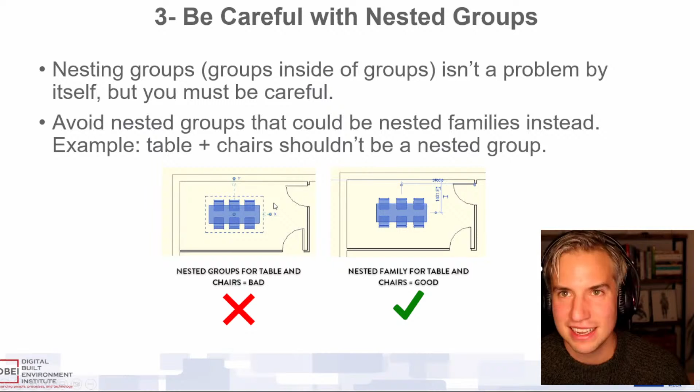So that's bad. What is good? Nested shared families instead. Maybe if we have enough time, we'll see a couple of examples of what I mean by nested shared families. But anyway, especially for furniture like that, it's just going to make your model heavier and cause all sorts of problems.

Let's talk about groupception.

The problem is that you get stuck in permissions. When you start modifying a group and somebody else wants to modify it as well, they ask permission, so you've got to give them permission. So when you start adding multiple groups, and maybe part of a group is part of multiple groups at once, you can cause a lot of problems with permissions.

And when you go deeper than 2 levels, things can get weird. So I'd say, generally speaking, as good practice, don't go more than 2 levels deep. I think 2 levels deep is the maximum I'd recommend. In theory it can be done, but it's pretty hard to manage, in my opinion.

And I would say consider unnesting the groups as the project progresses. So maybe at first, nested groups are okay, but later on, when you're in a more advanced stage, you can get rid of some of these nested groups.

So first, let's bust a myth: mirroring the group will not corrupt the group. It will not necessarily break the group. However, some elements can be reversed.

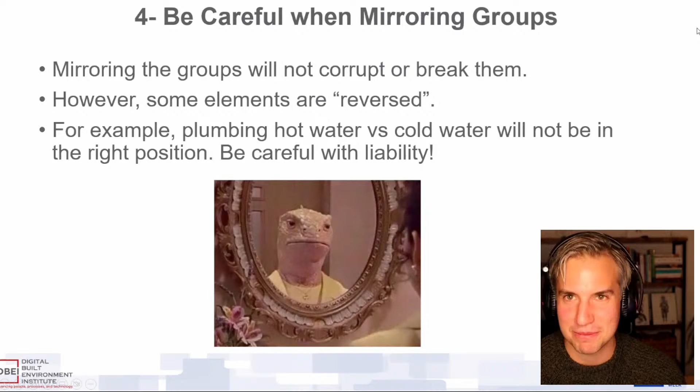So in some cases it might make sense to create a left and right variant. I would probably recommend just trying to mirror the group and see if everything works right.

Ceilings can be problematic as well — I've heard about it. If you have suspended ceilings and lighting families, they can get weird, so verify them if you're using mirrors. I added a link over there, an article by Tim Waldock, aka the Revit Cat, that says a mirror is anti-BIM.

Let me just briefly show it. So this is from our friend in Australia, Tim Waldock: 'Revit mirror command is so not BIM.' It lists all the weird things that happen when you mirror something — first, the element unique ID changes. Yep, Tim talks about lots of weird behavior that happens when you mirror elements.

However, it's funny — when I said that, Tim sent me an email saying, 'I'm not saying never mirror things, I'm just saying be careful with some of the weird things.' Be careful when you do.

Yes, yeah, no, I'll post a link to that. Tim's awesome, and I remember seeing that blog post, I think it was last year, maybe. I don't remember, 2021, yeah. So I'll post a link to that as well.

Tim was actually on the show too. Oh really? I think in like the episode 30s or something, and he came on to talk about NURBS modeling in Revit. It was pretty cool. So cool. I'll put a link to that too. Why not? Okay, so shout out.

But definitely, yeah, that was a great article, a great article to understand how certain elements react to mirroring, not just groups or within groups. It was just general, like when you mirror stuff, this is what happens. So it's a really really good read for sure.

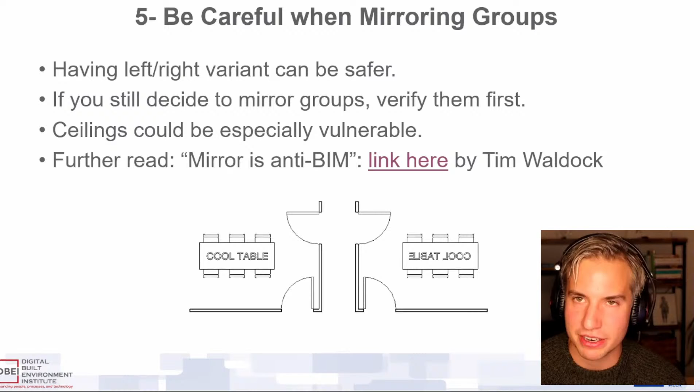Yeah, exactly. And I'll give another example — I have a 3D text and a table family that is embedded on it. If I mirror it, you can see that it gets weird. So again, not saying never mirror, it can be good, especially early on in the project. You want to save time. If you try to mirror and nothing seems to break, it might be okay, and later on you can start to create a left and right variant. So just giving you what you need to consider.

Right, okay, let's talk about fix groups.

Fix groups, as most of you may know, doesn't actually fix the groups. It gives you two options when you get this warning: how do you want to fix the inconsistent groups? The first option is ungroup inconsistent groups, so you lose the group and the elements will never be grouped again - not good. The other is create new group type, basically creating a different group.

I worked on projects back in the day, the first big projects using groups, where people got this warning and weren't very careful, just hit whatever option. 'Who cares, let's hit this button and see what it does.' 'Oh okay, apparently the group has been fixed.' But why hasn't this changed here but not over there? I don't get it. And there's 57 types of unit A all of a sudden - unit A 57, 56, 55. Yeah, I've seen that.

So if you get this warning, never click fix group - this is not a real solution. You've got to click cancel and try to figure out what happens. This is super frequent - if you've ever used groups, I'm sure you got this warning. It's mostly with hosting and hosted elements that you'll get this.

For example, you have a piece of, let's say, a toilet that is hosted on a wall. The toilet is part of the group, but not the wall. So if you copy and paste, the toilet is confused - where's my host? So you'll get this warning.

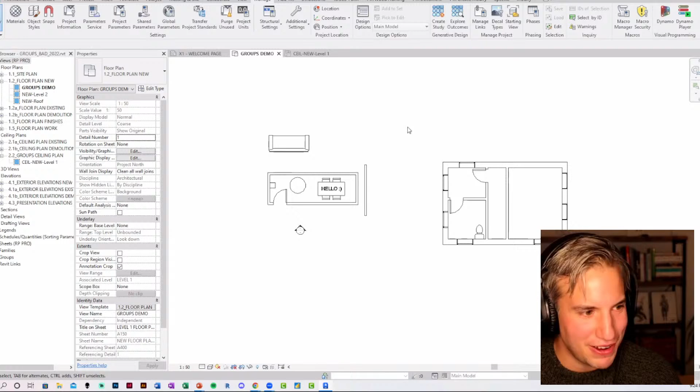Another one, let me bring in Revit. So I have the most boring possible sample file, but sadly my projects were all under NDAs for this one. Simple's better for a live demo because then it won't break as easily. Exactly. So let's create a group with this one.

I'll call it app01 - oh shoot, okay, let's call it apartment B. Let's go into a 3D view. Let's say this is my group, and now let me paste it and change the level to level 2. Right now it is fine.

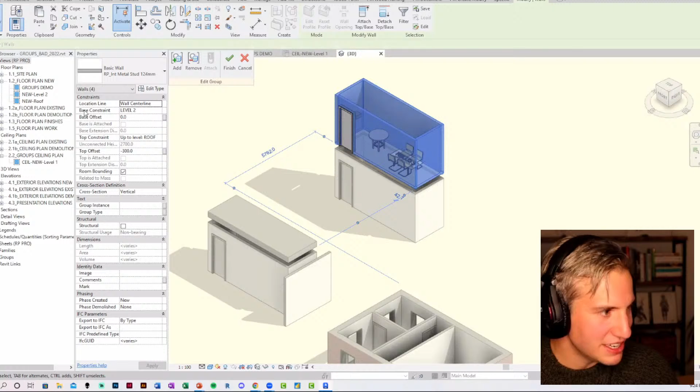Let me show you - okay, so this is good. You can see the base constraints, for example it's level 2, it goes to level roof. Everything seems fine. But if I change the height of the level, let's say that I push level 2 like this...

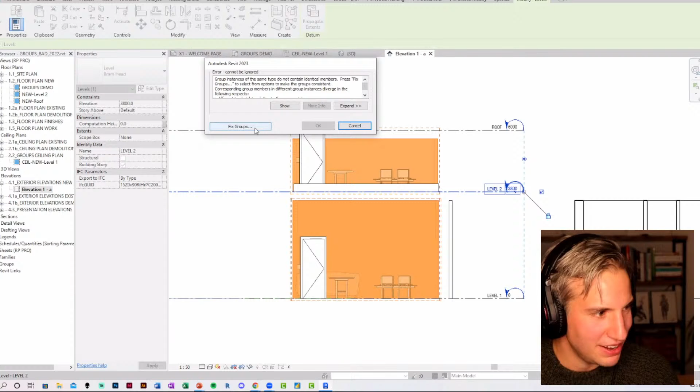...the group gets confused. I don't know what to do, like the constraints are weird. Yeah, you get this warning, blah blah blah. And if you don't pay attention, you hit fix groups, you get the two options. Click one of the two and you break the groups and cause irreversible damage to your model.

So don't do it, don't do it - or click cancel and fix it, that's it. Yeah, and you won't get it again, right? Exactly, yeah, that's awesome.

Don't lock and constrain the group to an outside element. Let's say you have a group and you constrain a piece of furniture to a window that's outside of it and lock the constraint. If you move the window, if you move the group, Revit will get confused. You might get a warning - maybe not the fix group one, but anyway, just not a good idea to do something like that.

When we're talking about layouts for apartments, don't include exterior walls, corridors, and party walls. So, let's say that we do a quick modeling.

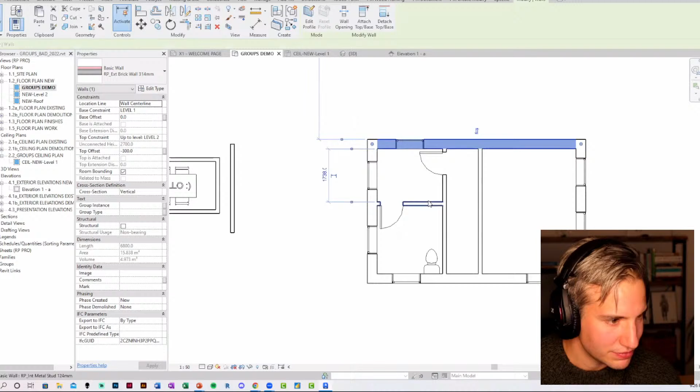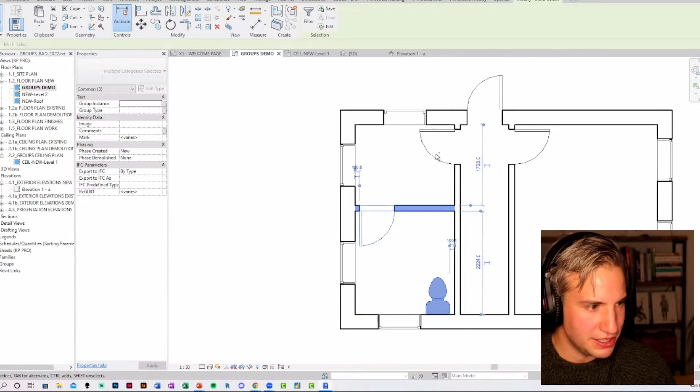Okay, let's say this is my apartment, right? This is the corridor, and let's say there's another apartment out there. This is the entrance - so this is apartment A, this is apartment B. What I would include in the group - I would not include any of the exterior elements, and I would include this, this, and this, and I wouldn't include the entrance door either because it's hosted in the corridor wall. So that's the only thing I would include inside the group.

Of course it's a fake apartment, you would usually get more, but I don't include the corridor wall because the corridor might touch multiple different units. Exterior - I never mix exterior and interior in the same group. It will just cause all sorts of problems.

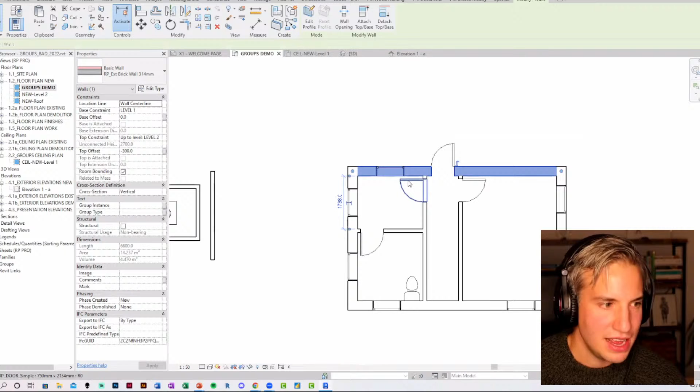And party wall - let's say you have a wall separating different units. How do you decide which group it's going to be in? Better to leave it out of the group. And would you not bring in the door either? That's attached - anything hosted to the party wall you'd probably try to keep out of it as well. Yeah exactly, like if you include an element, you need to include the host as well, which means the main doors on the corridor wall need to be on their own, not part of the group.

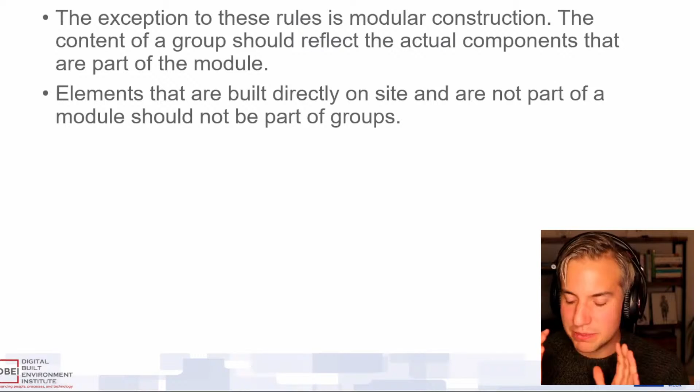I mentioned that the exception to this rule is modular construction. I've been working in modular, and the party wall, for example, is a doubled wall for each module. In this case, it makes sense to include everything that would be in the module itself. But if you're doing traditional construction, it's better to think in terms of interior versus exterior, and even interior, remove party wall, corridor wall, and so on. That makes sense, because you could have a modular unit that has exterior and the party wall, or at least all four walls, depending on what those walls are. Even in modular construction, part of the exterior wall is there, I just separate the siding, so the brick or whatever they're going to put on the module is done separately. So there are two exterior walls in this case.

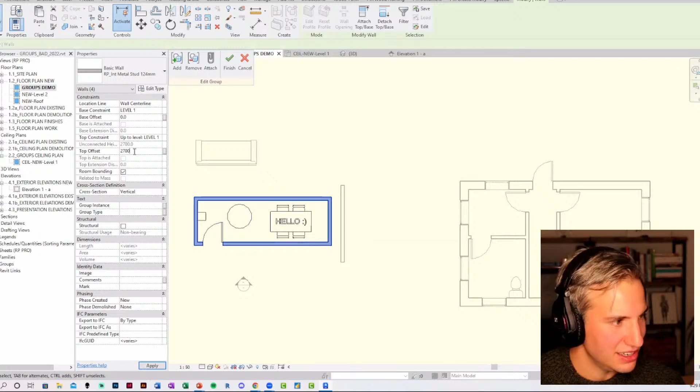Earlier on, I've shown what happens when you put constraints, and if you have different heights of the levels, you will get the fix group warnings. So what I recommend is to put unconnected, or you can just put the same level. So where do I have a group? Okay, let's say this is this group, and all the walls right now have to go up to level 2. So you could put unconnected and just put this offset value. Someone emailed me saying that instead of unconnected, I should just use level 1 and put the top offset, which in theory is the same thing, but I can see, depending on the wall makeup, there are some different reactions.

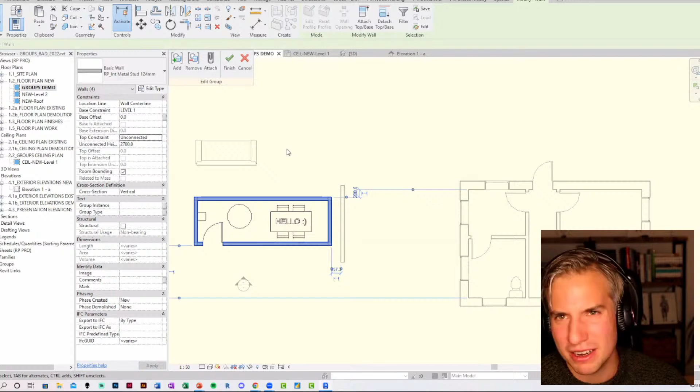I think there was some sort of bug that happens if you use unconnected. I'm not so sure about it, but that's what the person told me. It should have been investigated, but anyway, unconnected worked fine for me. I didn't have any issues, but I would have to look back. But yeah, use unconnected - you will avoid warnings if you use the groups on multiple levels and you have levels of different height.

Somebody in the chat has a question I think is pretty good for the example you were just showing, which is: would you include ceilings within those apartment groups if there were ceilings in there?

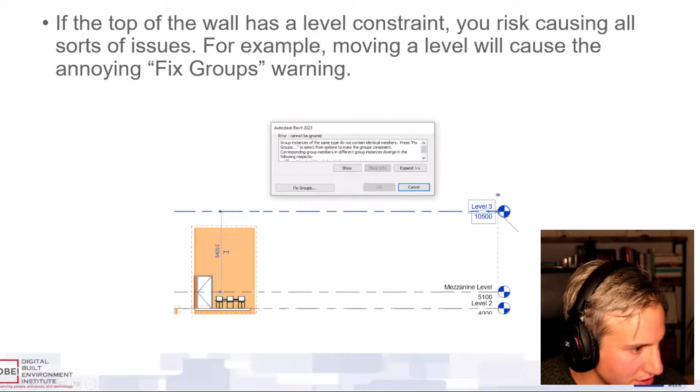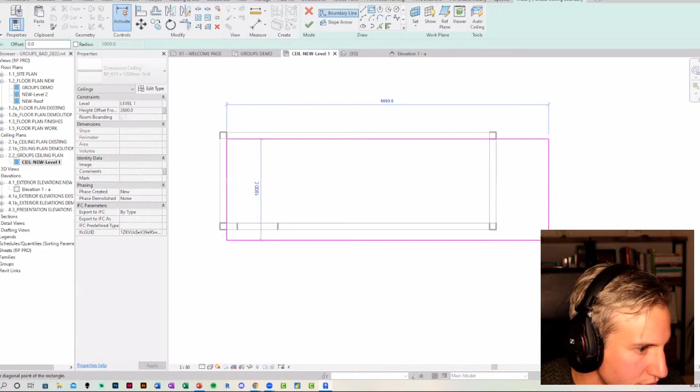Yeah, I would include the ceilings. I can show you where - do I have it? Maybe later, but anyway, I can talk about it right now. Do I have a ceiling plan in there? Let's say it's here. Okay, if I add a ceiling - okay, this is my ceiling. Make sure it is set to level 1 with enough offset from level 1 as well, and don't use level 2 and set a negative value, for example.

If you do that, it will get confused when using multiple heights. Makes sense. So yeah, but I would include the ceiling.

I don't know if the question is referring to some of the bugs that ceilings can have with mirroring and odd behavior. Maybe it wasn't that specific, but he said, would you just include them as part of the apartment groups or in their own groups, based on levels? I'm not really sure, but I think what you're saying there is keeping them as part of the group, but making sure that they're hosted to the same level as the group, same idea with the walls.

Maybe what he's referring to is that a lot of times, especially in residential, you might have a level for underside of structure or something, and then tops - depending on, especially in wood construction, a lot of times it's nice to have that bottom of joist or whatever, and so maybe that's what he's talking about. But as long as you have it hosted off the same level as the group, then you're safer, because if you host it off a secondary level, then you're not gonna do good, like you showed.

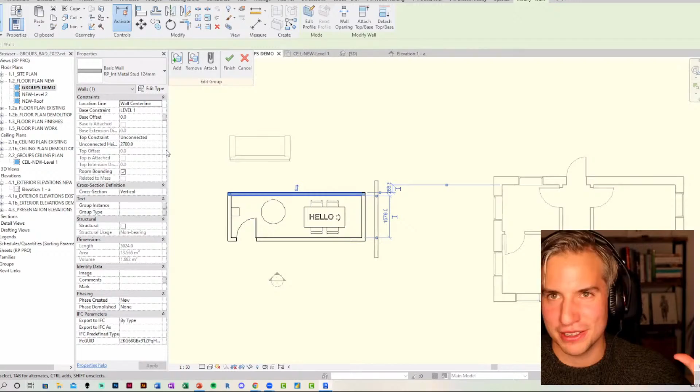Generally speaking, everything is hosted on one level. I've shown the constraints, the bottom and top constraint, everything is level 1, and make sure that all the elements are also all on the same level. I don't want to see any element on the group referring to anything other than level 1 or unconnected. Good point, so you will avoid lots of issues - lots of fix group things are just constraints that have gone bad. Fair enough.

Okay, I lost my page. Where am I?

He was referring to the ceilings within the groups, but if the level heights have to change, then remove the ceilings from the group. Then it's a different group anyways, right? If you have one group that has an 8 foot ceiling, another group that has a 9 foot ceiling, I'd argue that's a different group type. I mean, probably, unless...

There's like different heights on the same apartment, maybe, but those are all offsets from level one, right? So those would be consistent as far as the group. But if you went to another apartment type, let's say there's apartment type A, and the other one has A but it's 10 foot ceilings instead of 9, I'd argue that's a different type.

In this case, if you have really different ceilings, is there a case that maybe ceiling can be included? Maybe. Fair enough. All right, so we talked about that.

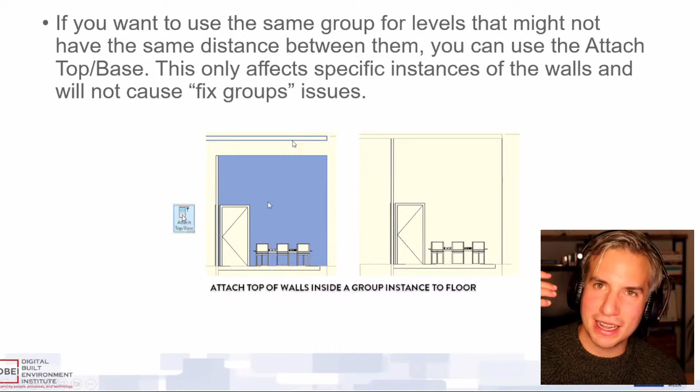Okay, so if you don't use a constraint to the walls, you do make sure that they go all the way to the slabs. So there's the only possible workaround for this. Let's go back to the 3D view and use this one, and I copy it again.

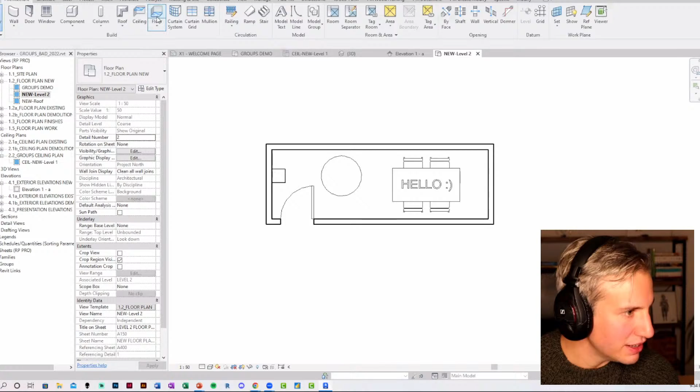Just having a look at something. Okay, now they're unconnected, which is good. Let me create - do I have a slab on this one? Not really, right? Okay, so I'll go to level 2 and just quickly create some sort of floor, and going back to the 3D view.

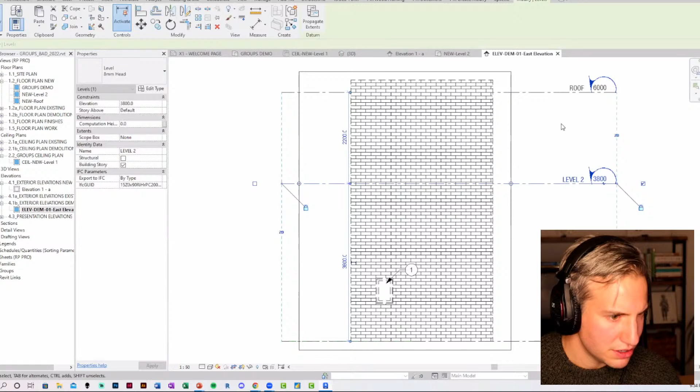Okay, let's just pull the height a little bit, and go back there. Okay, I don't need this. So the problem with this is if you have different level heights, how do you ensure that the wall will go all the way to the slab? So there's one thing you can do, one behavior that is specific to a group instance and will not affect the other groups, and it is to attach the top and the base.

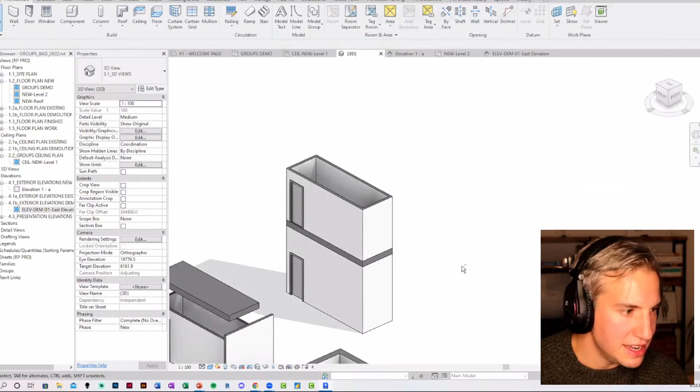So you can use this tool and attach like this, and you can see when it will be done. So you can see that this only affects this instance of the group. So we have the same groups, but this one we've attached it, but it doesn't affect this other one.

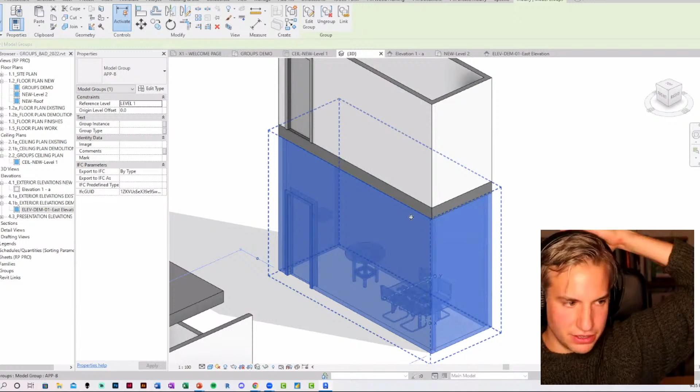So I know the attach top of wall can be a controversial tool. Not everybody loves this - it creates constraint. But in case you have different level heights and it bothers you that the walls aren't going all the way to the slab, it is the workaround.

Is that changing if you edit that group and select the wall you just attached - is that changing the data for the height? No, it's still saying 2700, right? Because that's the profile of the wall. Got it. Exactly. It's like if you did a profile edit.

And that's the only issue when it comes to the attach wall tool. In my opinion, as a downstream user of BIM these days, that can be an issue because what's reported as the wall height versus what the wall height actually is can be an issue. But that's a good question.

Let's have a look at the area. This one is 16, and this - it might give you the same areas or separate areas. No, it seems to compute the area difference, which is good.

But the unconnected height is not good. So that's again giving the geometrical information for the area, but having worked with estimators, sometimes they don't like looking at the area of the wall because they like to take just the length times the height and ignore the openings for the way they do the take-off. And so when you do that, that's when you start realizing the height of the wall isn't always the height.

And there's different ways too - even if you didn't do attach, if you did edit the profile and just pulled it or modified the profile, it doesn't change that height either. I've just noticed that. I don't think that's maybe the only reason why people don't like attach, but it's one of the things that has affected me for sure. Maybe in this case, if quantities and the unconnected height is an important value, if you really have different heights, maybe a different group can be used in this case.

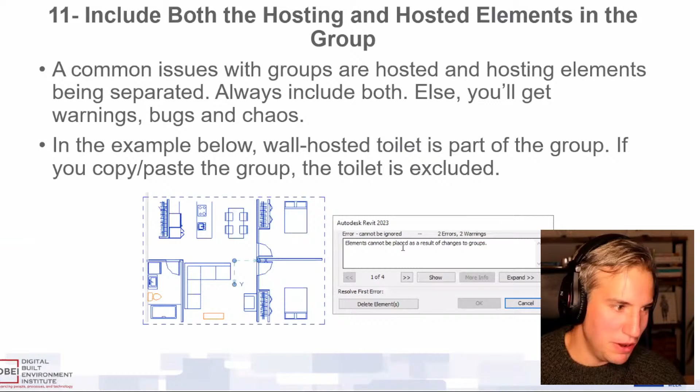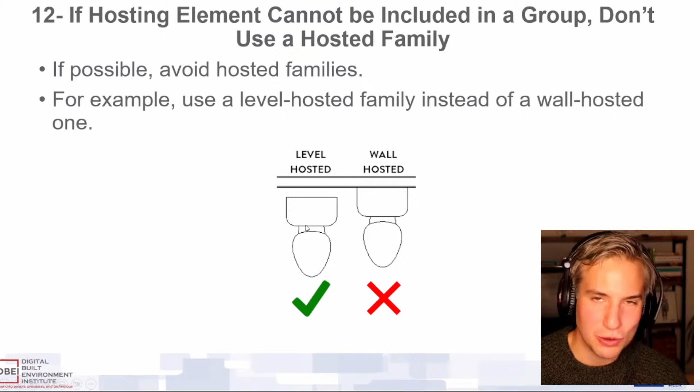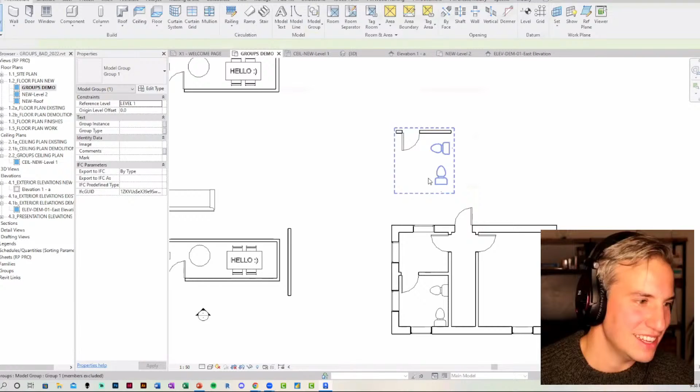Another problem with groups is that it's better to have elements that are level hosted and not wall hosted or hosted in other elements. Let's see what we have here, this toilet - okay, this one is wall hosted. Let's say this is my apartment, I place it there and add it to my group, then try to copy and paste. It gets confused because it doesn't find the host wall. You can see what happens: I only have a wall and a door now because the two toilets are excluded from the group. I can try to restore all the excluded elements, but it doesn't really work. So in this case, use level hosted families instead of wall hosted.

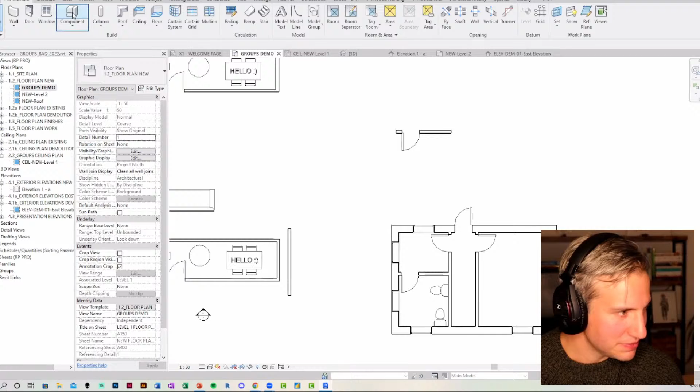So I generally prefer level hosted families when creating groups for multifamily housing. I avoid all sorts of weird issues like that - that would be my advice. As I mentioned earlier with the ceiling, the same thing: always use the level, the base level, and don't use a negative offset from the level that is above it.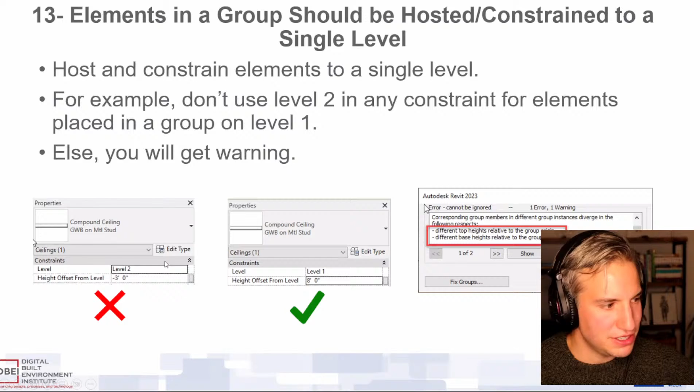Now let's talk about face-based families. I know you talked about this with Aaron on the last show. Face-based families, pretty controversial topic as well - they're weird with groups, I would say so weird with groups. I can't even tell you the amount of weird crap I've seen with face-based families and groups. Really weird behavior, and at first it might seem okay, and at some point you're like, what is going on there? Just weird heights, offsets, fix groups.

You can see an example here. If I have a face-based family and I give an offset to the group, the face base doesn't move. And this is for vertical - if you place a face base on a vertical plane, you will get this weird behavior. If you place it on a horizontal plane, usually it seems to be okay. But why would you place a face base on a horizontal plane? Good question. But with the tests I made, it doesn't seem to cause issues.

I guess the horizontal could be with ceilings - a lot of face-based families for ceilings, and that's true. Even that can cause some wonky stuff to happen. So maybe in this case, just avoid them as much as you can in groups to avoid problems. Agreed. The same for work plane based families as well.

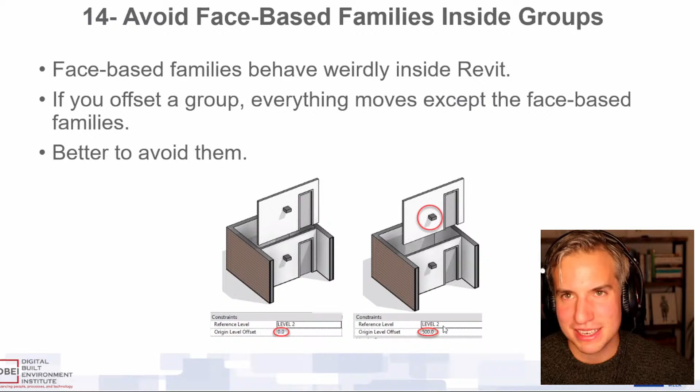They're pretty similar to face based and seem to have the same kind of issues. For those not familiar, for any Revit family you have a checkbox that says work plane based, and it causes the family to become very similar to a face based family. So I would avoid that as well, and even wall hosted. Generally speaking, just standard non-hosted families work the best for that. Definitely.

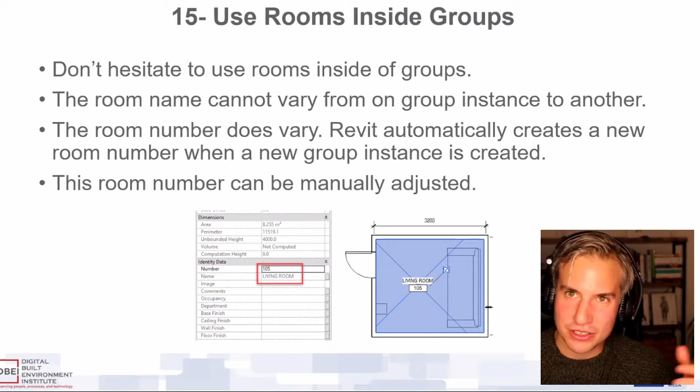Use rooms inside groups - I would say rooms work pretty good in groups, generally speaking. What happens when you place a room is that the room number can be changed, but the room name cannot be changed. So you will have to keep the same name everywhere. If that's a problem for you, well, just don't put the rooms in the groups. But you can change the number, and it's automatically adjusted to the next one if you copy and paste the group.

I can see the time fly, so we'll surely be getting into some Dynamo stuff, but let's finish some of these tips. All elements inside a group are in the same workset. If you're using worksets, don't even think about trying to add elements on multiple worksets - it's not good.

Even if that wasn't the case, elements inside groups are assigned to the group's workset. Each group has a specific workset, and when you change it, all elements inside are assigned to that workset. In theory this shouldn't be an issue, because the workset of the elements is acquired from the group, but it's something important to be mindful of.

If you're using worksets in a way where you place elements in different worksets, although I generally recommend using worksets simply, keep in mind you will lose that, because the group has a single workset for all elements inside it. Generally speaking, all group instances, if you copy and paste a group, make sure it's on the same workset, else it could get weird.

And phase setting as well - the group itself doesn't have phase created and phase demolished. You cannot phase a group by itself, but each element inside the group does have that parameter, and the phasing can vary from one group instance to another. So you could add the exact same apartment, and one is created in phase existing while the other is created in phase new.

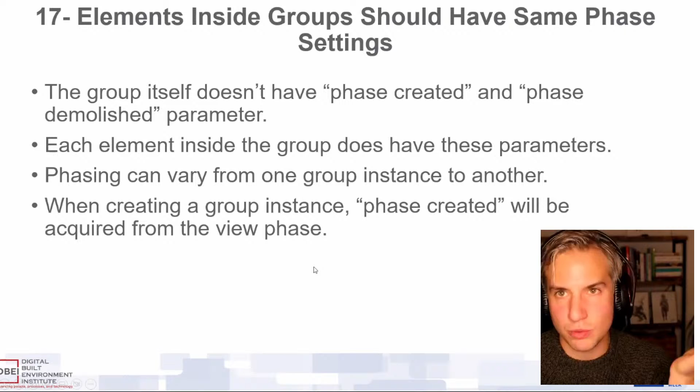But when you paste a group instance, it will acquire the current view phase, like any new element. Maybe I can try that a little bit, so you can see here.

So I'm taking this one and let's paste it into the existing floor plan, pasting it over here. You can see I have a phase filter that makes it gray. And if I go back to this one, it's over here - you can see it's gray.

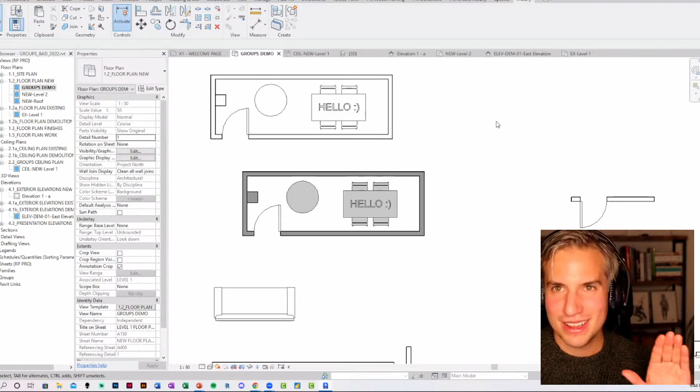Why? Again, no phase settings for the group itself. If I enter the group and click on this wall, it says phase created existing. And this one, if I edit the group, phase created new - which means that it's the same group, you click it, apartment B, for both of them, but the elements inside can have different phases.

And it can get even weirder, each element could have a different phase. So this specific wall is new. I don't remember if it holds... that was an issue, and that's a great point. Hopefully everyone follows that - the elements inside the group have their own phases, and they're going to have phase created just like you would with any element. Whatever you paste or create the element in, it's going to have that phase.

But I don't remember - does it hold phase demolished as the previous phase or the current phase, or does it not even hold demolished when you paste it? I don't remember. You have to test that - it won't hold it if you copy paste, I don't know, let's see. I'm curious, okay, let's try it.

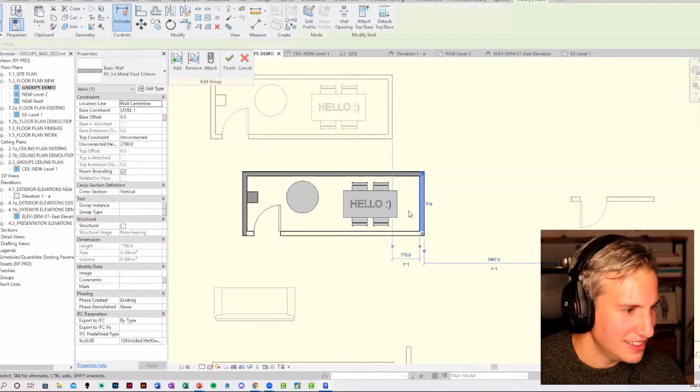Sometimes with those elements it might actually - like when you bind links and stuff, it tries to map that demo correctly, but I don't know if it will. Well, I've just switched this wall over there to demolished, and we'll see what happens.

It doesn't affect this other wall instance. But let's say that I take this group and paste it into the floor plan view, pasting over here on top of another one. It seems that copy and pasting doesn't affect the other wall, of course.

It resets the demolish - it just ignores the phase and resets it. And that's good to know, right? Because you could be sitting there thinking this is great, I could show the same demo in every single room and in the same phase, but I guess it doesn't work that way.

So personally, I like simple, which means I'll tell users to try to put everything new inside the group - if you're doing demolition or existing, don't put it in the group, it could confuse people. And I wouldn't mix different phasing. I'd try to make it simple, one group per phase, or something users can easily understand, and not try to do some fancy multiple-phase setup on the same group. It seems confusing. Of course there are exceptions depending on everyone's workflow, but that would be my advice.

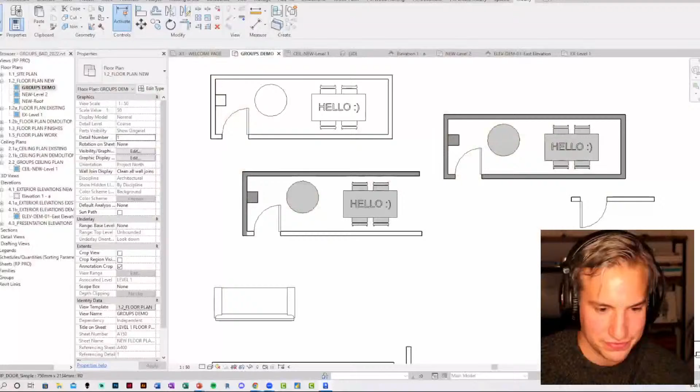Okay, so that's for phasing, I've just shown that. Don't make groups too large. Remember that only a single user can modify a group, else you will get the permission hell, as I call it. The more elements your group includes, the more complicated it is to collaborate. Avoid permission hell. For example, creating a group for an entire apartment floor, that's something I saw on the tower - one group for the entire, like, 4 apartments. I think that's too much. Keep it more simple.

Let's talk about something really interesting, an argument I actually saw against groups over links when it comes to modular construction. Groups are porous. What does that mean? It means they will try to join to the element next to them, which is probably okay in regular construction. But as I mentioned, I'm doing modular construction, and I don't really like these joints at all because it's a totally separate element that is going to be constructed separately. So let's go over there.

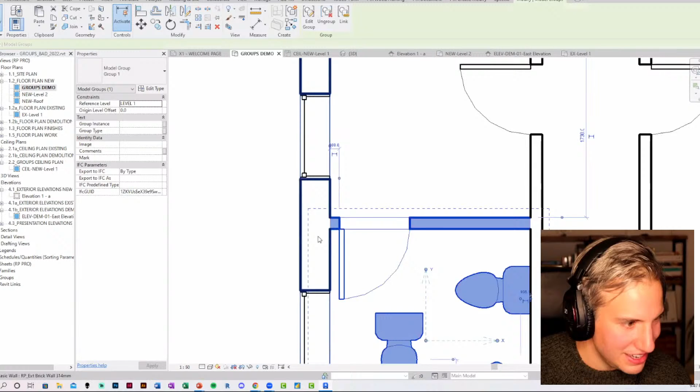Okay, you can see right here, let's say that I create a new wall and I paste this group over there. Whatever, and if I move it there, you can see that it joins. That's what it means by porosity - it just absorbs everything. It interacts with your environment around it.

So there are solutions to it. You could decide to dissolve the join and move it like this, and now you've fixed the issue. But if you're doing modular, it's something you have to think about for every single wall. I've done it on a modular job, and it was every single wall - I had to make sure that I wouldn't see this line because it didn't make sense.

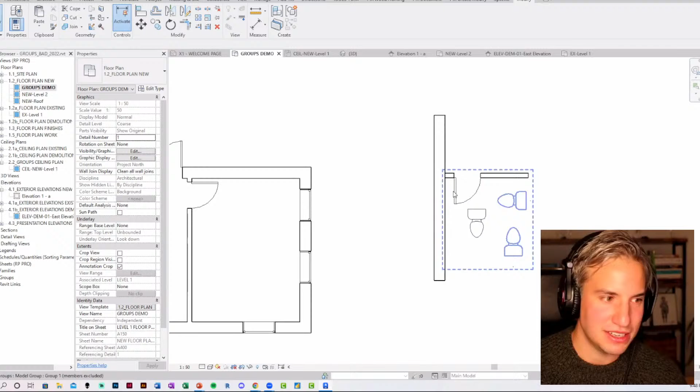Alright, okay, I think we went through the whole thing. And another one I would add - don't use groups if there's a single instance of the group. I don't know why, sometimes I enter a project and think, why is this a group? I select all instances in the project and there's a single one. Like, why is this a group? I don't understand.

Something else - groups can be cool early on in the project to copy and paste similar things, but then you can ungroup. If you want to quickly recreate a layout, you can create temporary groups. They're good for that as well.

Definitely, something Chris mentioned, who had the question about the ceilings, is echoing what you were saying about worksets or working - you can only have one person working in the group at the same time, and so having ceilings separate is helpful if you've got someone working on RCPs and someone working on the floor plan. That's a valid point. Yeah, makes sense.

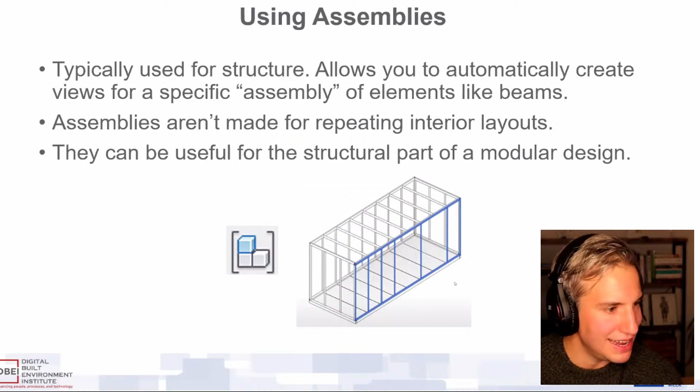So this one was about groups versus assemblies versus nested families versus links. Generally speaking, I won't go too deep into that - assemblies are more for structure, generally speaking, and nested families are pretty cool. I mention it because I see a lot, when working with people, that a lot of people are using groups when they should be using nested families. I'm guessing most people are probably a little bit familiar with the idea of nesting families.

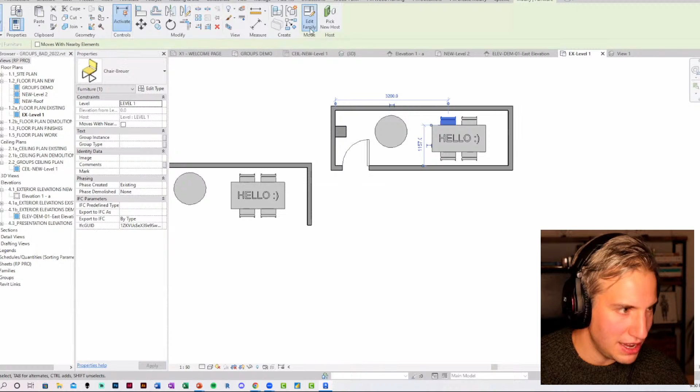But I have a good example here. Let's say that I ungroup this one - to me, this is not great. If I want to use this table and chair multiple times, it might be a good idea to create a nested shared family. Let's say I have this table, and let me go back here, and I want to add a chair inside of it as well. So when I have the shared family, I just make sure the shared box is checked, and I load this into the table family.

Sean Page just said familyception. Yeah, nice - groupception and familyception.

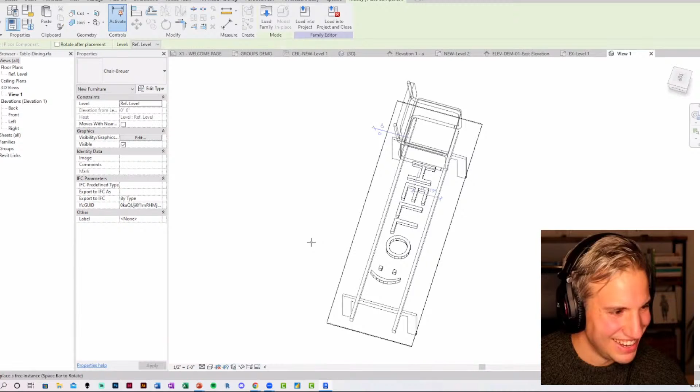Of course I could be much more precise and use reference planes. But what's cool about shared families is you can use visibility parameters as well, and you can add a family type parameter where you could swap chairs if you have a couple of them loaded in the same family. For now, let's load this back into the project.

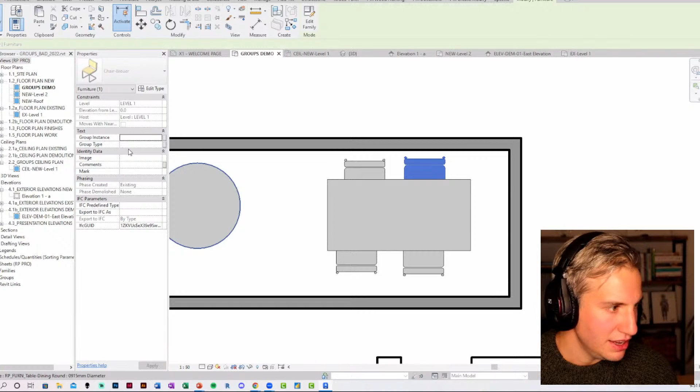And now, of course, I will have too many chairs, so let's delete these. But this is shared families. And what's nice about shared families is you can tab select the individual part of the family. So I can tab select this chair, and it can have a unique mark.

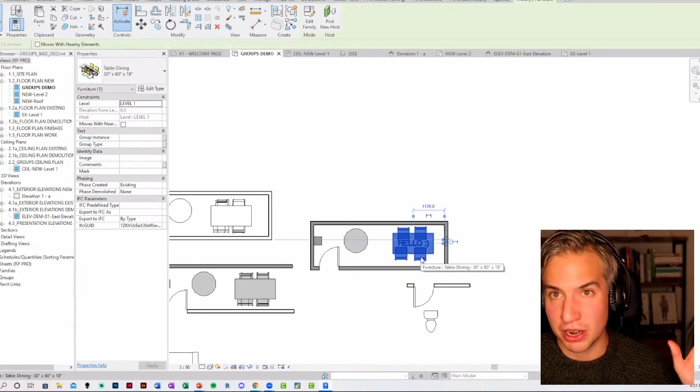So it's really kind of a separate family, but that is part of it. I'm sure most people might be familiar with this, but I mention it because too often I see groups when this should be a shared nested family. For performance, this is much better, nested shared family, much faster models, right? Especially if you have lots of occurrences, because groups can be a bit slow if there's too many of them, especially multiple nested groups. As I mentioned, groupception, like familyception is better than groupception.

Okay, shared. I did put a reference from Belinda Carr that really compares model groups to nested families, and she gives an example of an operating room where, let's say there's 200 operating rooms in a project, and it's always the same layout. A shared family is good for that. But shared families have a limitation, it's only loadable families, so you cannot include walls, you cannot include floors, you cannot include ceilings. But other than that, they're pretty cool.

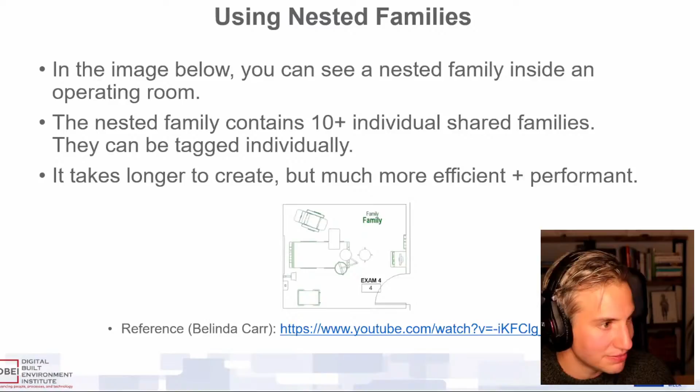I really like nested shared families here. And they're schedulable as well, so like the chair I had, it can be scheduled individually, separately from the table. And you can tag them as well, tag the individual elements, not just the whole family. And if you're doing groups anyways, none of those elements should be wall hosted, even for that operating room, so it shouldn't matter.

Okay, so the limitation with nested families is they don't include system families, so groups are still helpful for that. But you could have a group with multiple nested families. Something I saw is for bathroom layouts as well, like the handicapped bar and all the soap dispensers and so on, which is such a bore to model. You could have a shared family that includes all of this stuff, and you place it into your apartment, and then that is part of the group as well.

Okay, links, as I mentioned, you talked about that with Aaron. I won't go too deep into it, but you can read the handout. I did put a few of the pros and cons.

Mostly, well, it's just annoying to work with. It depends how many models you have, but I was working on this modular project where there was like 50 models, one for each department. It was not very fun to work on each of these. Editing can be a pain too, and I could tell you, inheriting projects like that when you didn't set them up is always fun, figuring out type A, type B, and all the links. I've been there.

And with links, there are no instance parameters for the elements, we're going to talk about this as well. And reloading the content, if you change the wall types and families, you have to use some sort of Dynamo script to push all the content around. So not that fun, and to tag and dimension can be problematic.

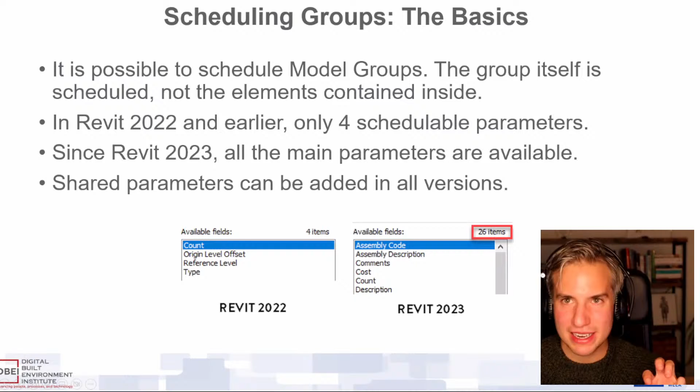So scheduling groups, if I try to schedule the groups, well, you can see that in Revit 2023 there are a few more things you can schedule, but still you cannot really schedule the elements inside of the groups, it's just the group itself. So what are you going to say about the group, not that much, right? You can know how many units you have, but that's probably already covered by the rooms. So this is an example of a schedule that you can make with groups, not a lot of information. I have 4 apartment B on level 1.

Okay, but if you want to know everything that is included inside of a group, for example, I have the whole process to automate with Dynamo. I don't think I'm going to recreate the whole script, but the first thing I would do, and it is pretty crucial, when you create new parameters, I usually create two: one called group type and group instance, and assign this parameter to all the categories that could be included inside the group, so walls, ceilings, plumbing fixtures, furniture, and so on. Got it, so you're just making an instance and type parameter, and then you're adding that to groups.

So you have somewhere to type in beyond just the group type. The elements within the groups have the ability to assign a parameter to themselves. Super important, make sure to check this box: values can vary by group instance, which means that on different groups there can be a different value for the same element. If you check the other box, the parameter will be grayed out, meaning you have to enter the group to modify it.

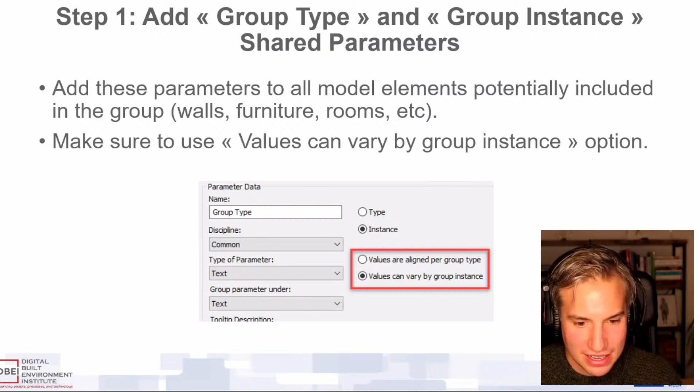I think I could, if I have an example. Well, I've already pre-assigned these parameters, and you can see that I can enter a value for this one. And if I select this one, it's not entered. That's right, awesome. And you're not going into the group to do it, you're tabbing and selecting.

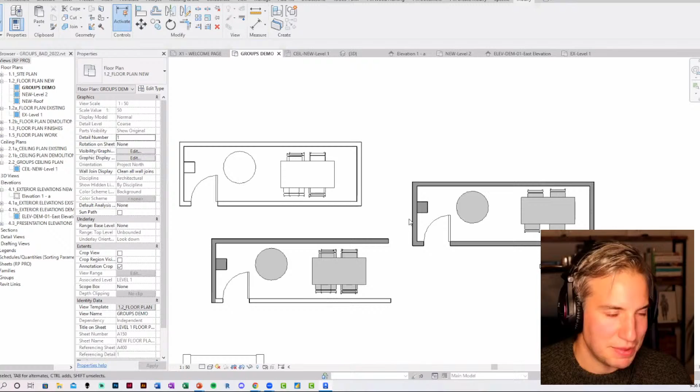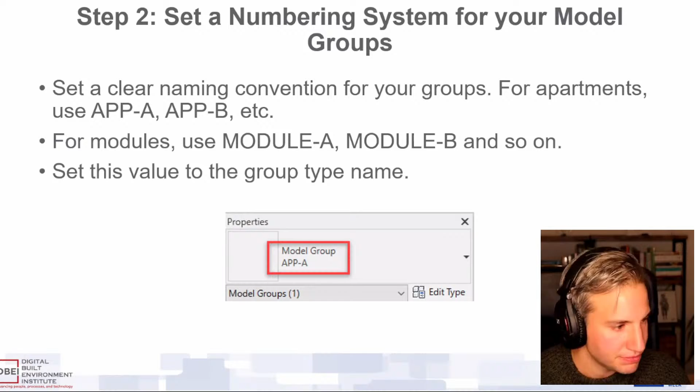Got it, but with Dynamo it's going to be done automatically. So what's the next step? Create the parameters, assign them to all the categories. And then I like to use a numbering system that's going to work easier with Dynamo, because maybe you have some groups that you want to automate, but not all of them. So I try to have naming systems, like apartment A, apartment B, or module A, module B - some sort of prefix.

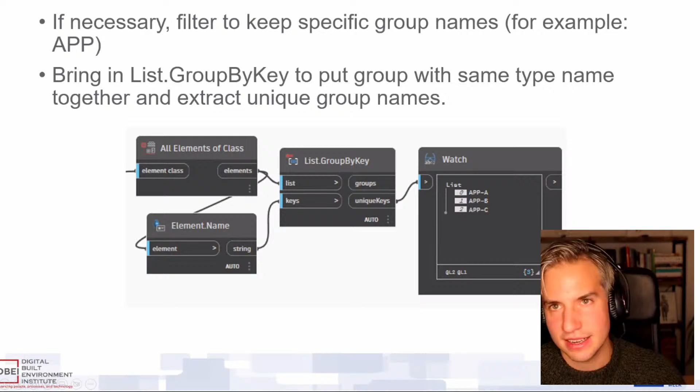And the Dynamo script - I'm not going to talk about all the steps, I'll just say the list group by key node, when I found out about this node I was pretty riled up about it, this is one of my favorite nodes. You can basically see how many unique groups I have in the project. So I know maybe I have 20 groups, but the unique groups are apartment A, apartment B, and apartment C. Then I can group them together in Dynamo, and I can find the unique group name.

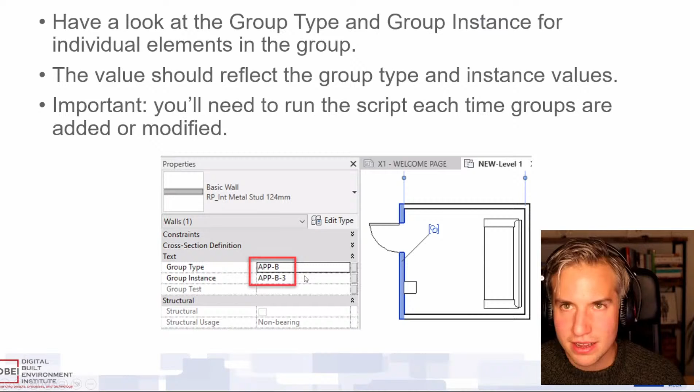Anyway, you can download the script at the link I gave earlier on, revitpure.com/build2022. Anyway, gonna skip that for now, and I do have steps if you want to recreate this. But after you run the script, this is what happens: you have apartment, it says the group type is apartment B, then the group instance is apartment B3, which means that there's at least 3 apartment B.

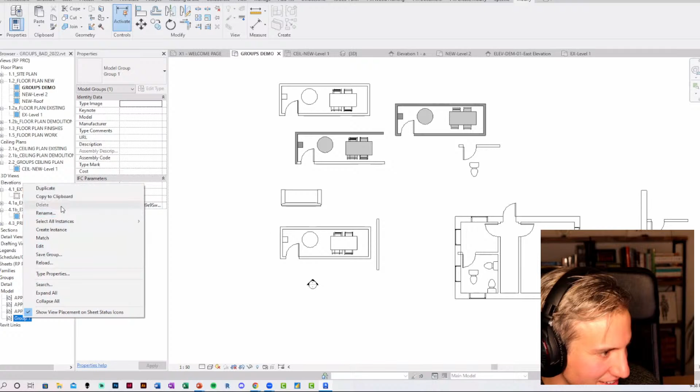Okay, let's work out how many groups is this a group? And you can actually see the groups in the project browser. If I go to model groups over here, and let me ungroup this, and I can delete it. Can I delete it? No, it doesn't want to. Maybe there's ones placed - yeah exactly. Can I delete it now? Yep, now I can, good. That's a good tip there - you can't delete a group if it's placed in the model.

Okay, now I have one group left. Now it's all messed up because of the phases, let me just clean it up quickly. Okay, so let's say this is apartment B, and I'll group this whole thing, and this is apartment A.

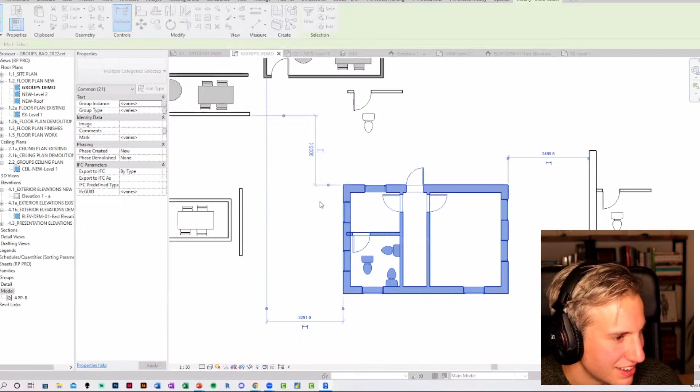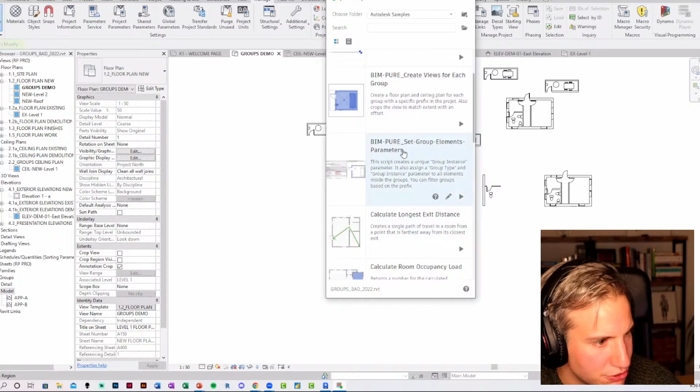Okay, let me create a few instances. And then I'm going to the Dynamo player, and the script is compatible with the new Dynamo player from Revit 2022. It's called BIM-Pure Create - no, it's not this one, Set Group Elements Parameter. So I'm going to click here, and now it says you have to map the group instance parameter name.

So it's pre-named with the right parameters, but you could use custom ones if you want. And it looks for group prefix, so my prefix is 'app' - you could use something else if you want. I'm going to click on run, hoping it doesn't crash.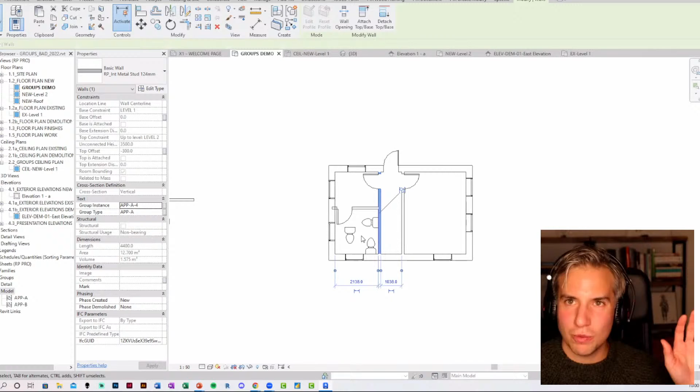Seems fine so far. So clicking here, you can see that this wall says the group type is apartment A, the group instance apartment A3. If I look at this one, it says group type A, apartment A-4. So it gives both - you can know which group is this, but which instance it is as well. Awesome, I love that. I'm just running through the Dynamo logic in my head - I think it'll help for some people even if they download the script. It's basically just taking the group name and pushing that to all the elements within the group, and you're doing it in sequence based on the type.

So that's awesome. From there, how do you schedule it now? I don't remember if I have a pre-made schedule for this one, I hope I do. Maybe not, but okay, we'll do all this stuff. Let's go create a new schedule, and then I create a multi-category schedule. And since Revit 2022 you can have system families and loadable families in a multi-category schedule. And then of course you can filter.

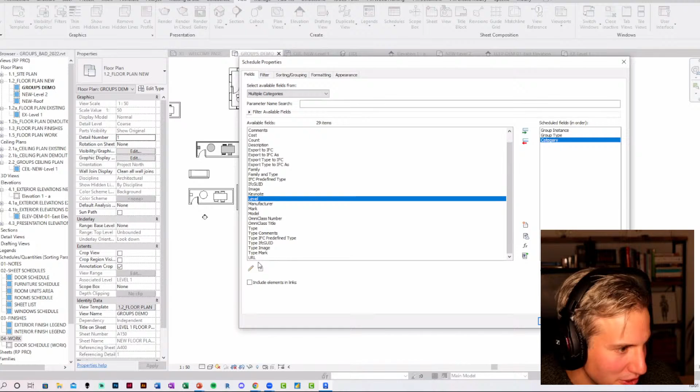Okay, I have the group instance and the group type parameters over there. And then I can put category and what else do we want to know? The mark, maybe description. Anyway, let's start with that, and I will filter by group type.

Let's say I want to schedule for apartment A, and sort by category, and we'll see what it does. So right now I can see whatever this amount of doors is in apartment A. There's four of them in apartment A1, four of them in apartment A2.

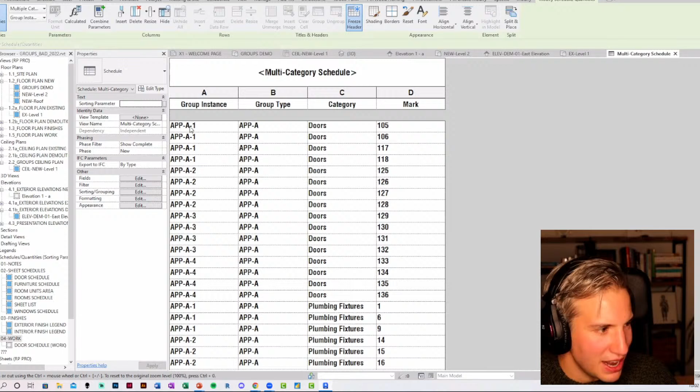Of course, with schedules, you can play around with formatting and sorting. You could have a schedule with only apartment A, or you could decide you want to schedule the group instance. And if you're doing a door schedule, you can even say which group it is part of, or which apartment.

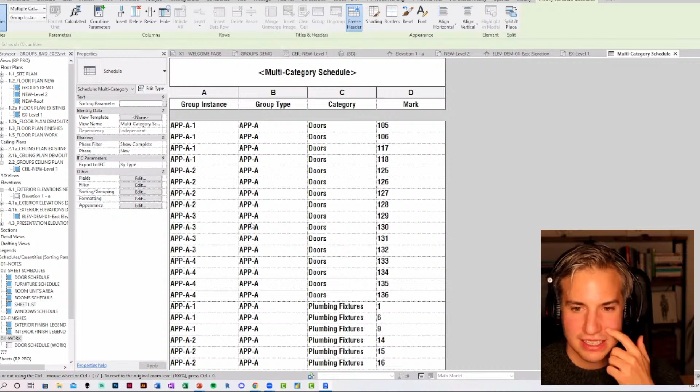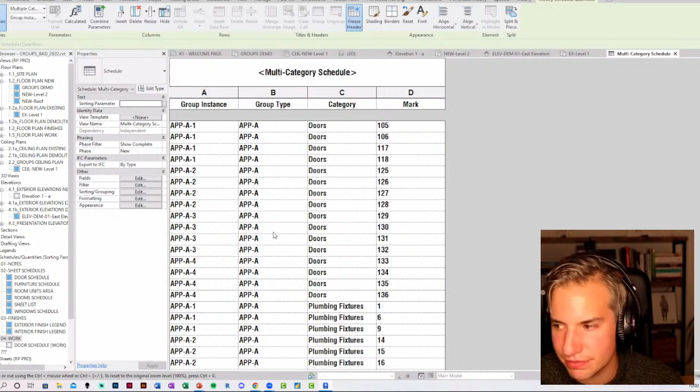So basically, with this, you can have everything included inside of an apartment. And this was especially helpful with modules. With modules, we can know every single thing that is part of the module itself. I think I have better examples of this in PowerPoint.

No, I love that. Conceptually, I think that's the important part, right? In theory, you can schedule elements within a group by default, because they appear in your schedules, but you have no idea how they relate to the groups.

So what you're doing here is you're pushing a value into a parameter of all the elements within a group that tells it that it's in the group, and then you can filter that within the schedule, which is awesome. So now you know where this element exists, which is phenomenal.

Very cool. By default, there's no way to tell which group an element is part of. Elements don't know what group they're in. I have to imagine they do, but I don't know that we can use it. It's somewhere in the API, I guess. It's got to be there.

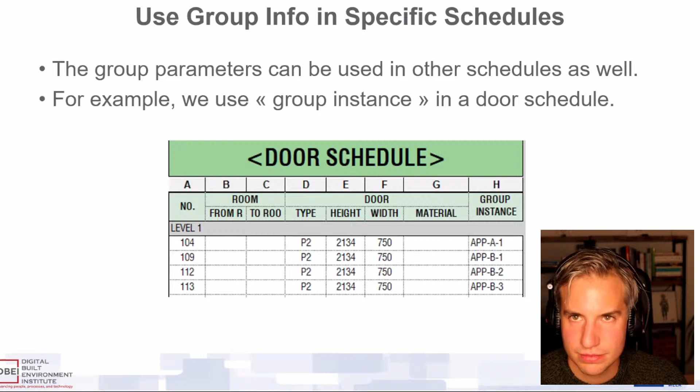For this one, it's a bit different. It's sorted by the unique apartments. And for this one, if you have a door schedule, you could say, oh, this is part of this group instance. Which is nice. That's super nice to be able to have them by number and level like a door schedule, but then actually use that parameter to tell you what group or what apartment type it's in or something. That's super cool.

And this is another script. I will show all the steps to do this. No, just kidding, I will just show the result. Let's start another live stream. Hold on, again.

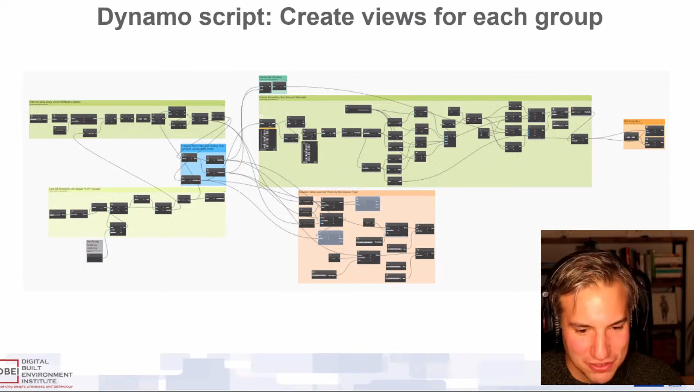Yeah, this one is to create views for each group. And creating views is boring. There are lots of plugins now that can do this stuff, but you can do it with Dynamo as well. Let me show you an example.

You know what? When I presented this at BILT, I had an older version of the script and it didn't work, and I kind of looked like an idiot out there. So I'm hoping for a little redemption here. Let's see. I'm hoping it works.

Okay, so it's create views for each group. What this does - you have to select the view type and the view template. So I'm using group ceiling plans. That's good. The ceiling view template, that's not good. Let me use ceiling plan new. Floor plan view, okay, that's good. That's good. Prefix looks for apartment. Let's run it.

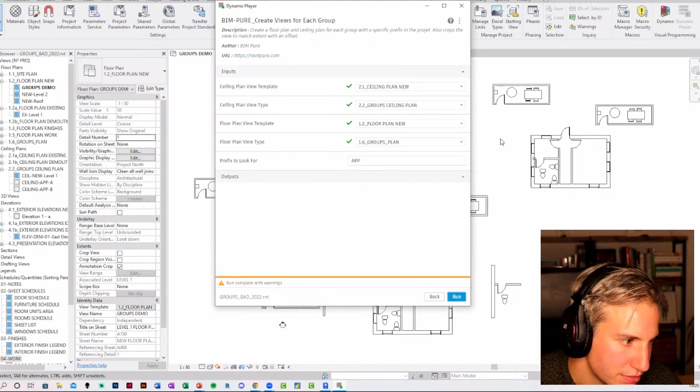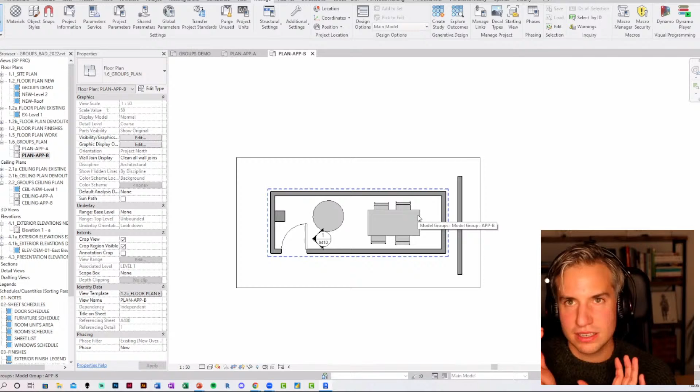It says there are warnings, so not a good sign. But looks like it did something though. If I go to, so I have 2 apartments in the project, it seems that it has created... yeah, I think there's maybe an issue with phase on this one. But what this does, it crops the view around it.

How is it determined? Is it determining the first instance when there's multiples? It's the first instance, got it. So if you look at the groups, if I go back to the 3D view, it will be the instance that is... by the way, when you select the group, there are unique instance numbers as well. So I do include the group instance parameter. You can add it to the model group category as well.

So the original should be this one, right? No, this is 2, this is 3. One of those. There it is. This one. So yeah, the crop view will take this one, the first. Basically, Dynamo takes the first element ID, I guess. Usually it's in order of creation, the first one that has been created.

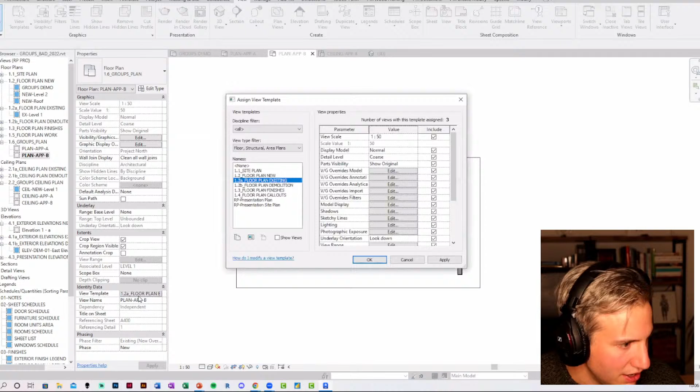It seems that I remember there was an issue with phasing. Anyway, it seems weird, maybe it needs a couple of touch-ups, but like the ideas, generally speaking, seem to be working. No, that's cool, that's a great idea, I love it. Awesome, this is great. I think everyone got some value, some great comments in the chat.

So awesome man, appreciate it. Any final words before we wrap up? Yeah, I'm trying something new. My whole Revit Pure Live season that I've just finished was about families, and I'm trying a cohort-based course.